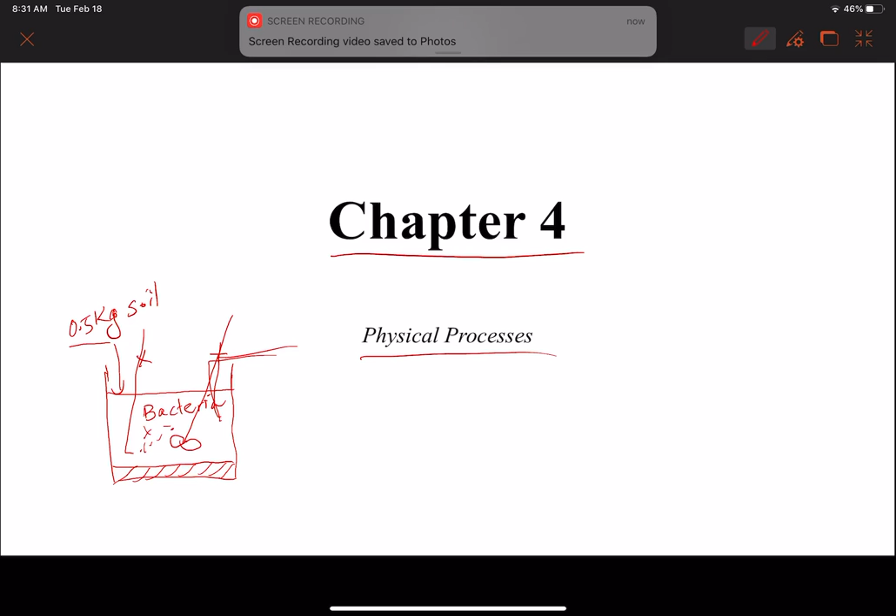About chapter number 4, physical processes.

In physical processes we have a small tank like this, and we use this tank to treat organics in water or organics in soil. There's the flow in, the charge in, concentration in, and at the end of treatment there is the charge out and concentration out. It's simply like a tank, and this tank is used to clean up soil or water with contamination.

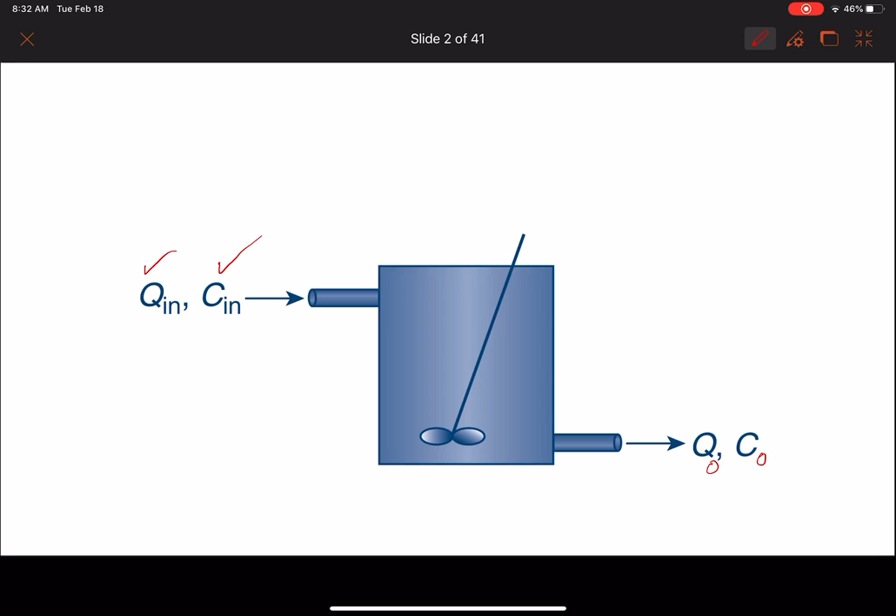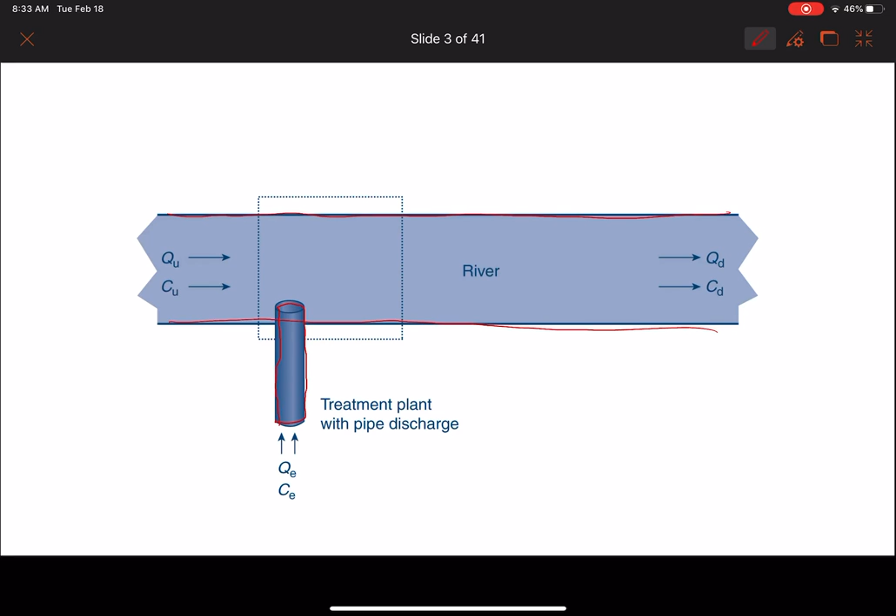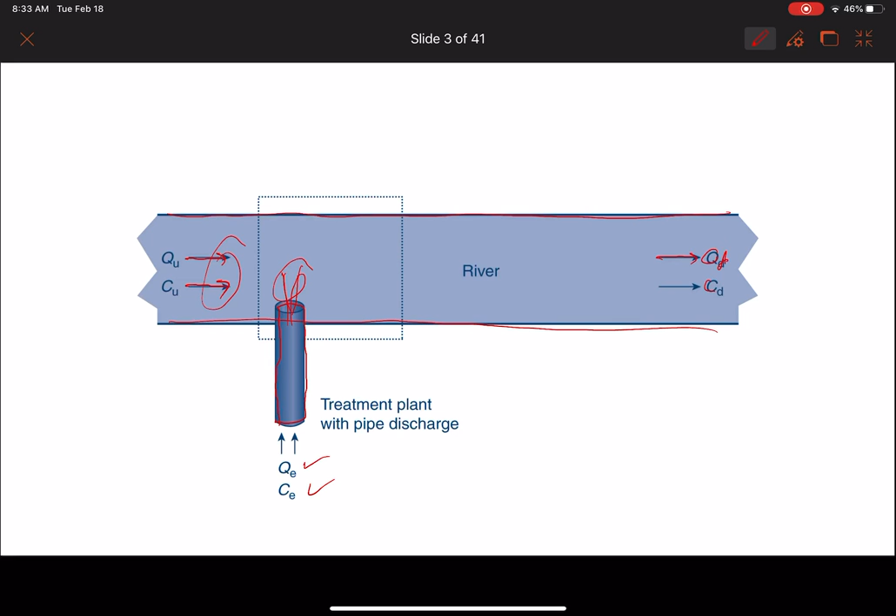Now we're going to use this process to model the physical process of environmental pollutants. You'll see it's either a tank or a river, with a pipeline coming from the Ministry of Public Work. This pipeline is emitting wastewater into a river flowing with discharge upstream and concentration upstream, plus the pollutant from the pipeline, which has its own discharge and concentration. This mixes to produce flow rate downstream and concentration downstream. This is an example of what we're going to see in this chapter.

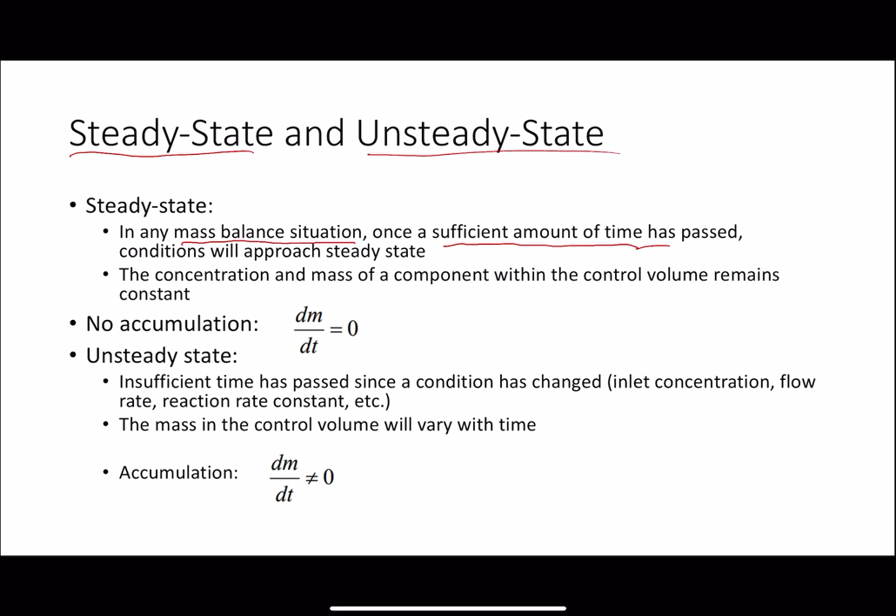Let's look at this. Once we are doing physical process, we should differentiate between steady state and unsteady state. What is steady state? In any mass balance situation, once sufficient time has passed, conditions will approach steady state. For example, if a physical process takes a long enough time to reach steady state, that means the change of mass with time is zero, because the concentration and mass of the component within the control volume remains constant.

Unsteady state is when there is no sufficient time that has passed since the conditions changed—we're talking about inlet concentration, flow rate, discharge, and reaction rate constant. So the change of mass in the control volume did not reach zero; it will be variable, not equal to zero, it will be different. This is called the accumulation.

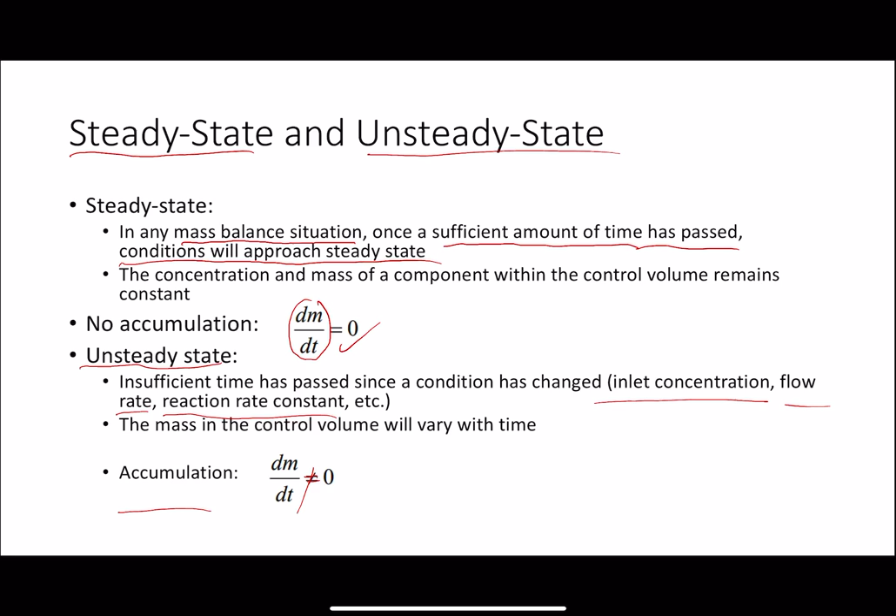For this chapter, there are a lot of models available in environmental engineering booklets, but in this one we'll be studying reactors, and we'll see what reactors are available for this class. These reactors are generally control volumes. Reactor models we'll talk about include the batch reactor, the continuously stirred tank reactor (CSTR), which is a continuous reactor—sometimes called CMFR, completely mixed flow reactor—and the third reactor is the plug flow reactor, which is also continuous.

This one is a batch reactor, which is not continuous. The only continuous ones are the CSTR or CMFR and the plug flow reactor. What is the meaning of a continuous reactor? If you have a tank, flow in continuously and flow out continuously—it does not stop. Same thing for the plug flow reactor: discharge in continuously and discharge out continuously.

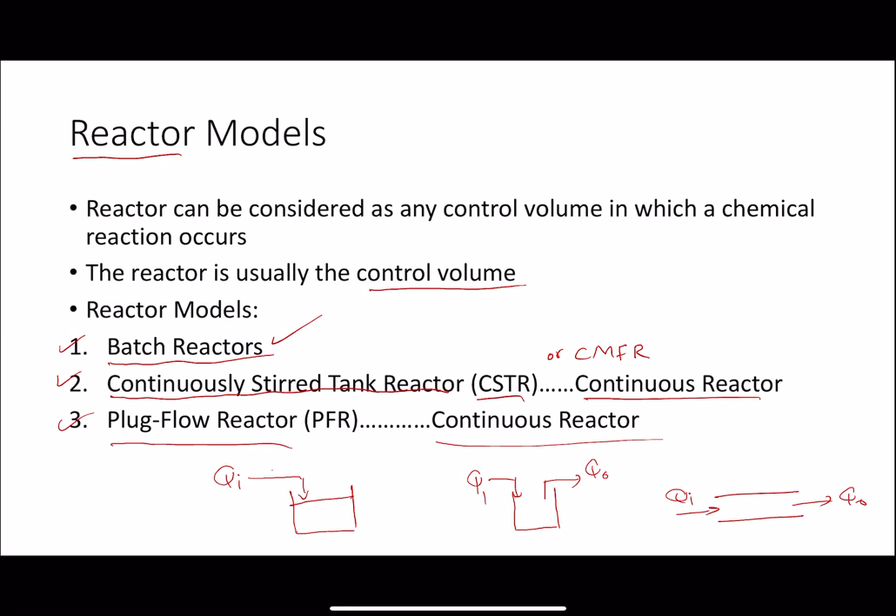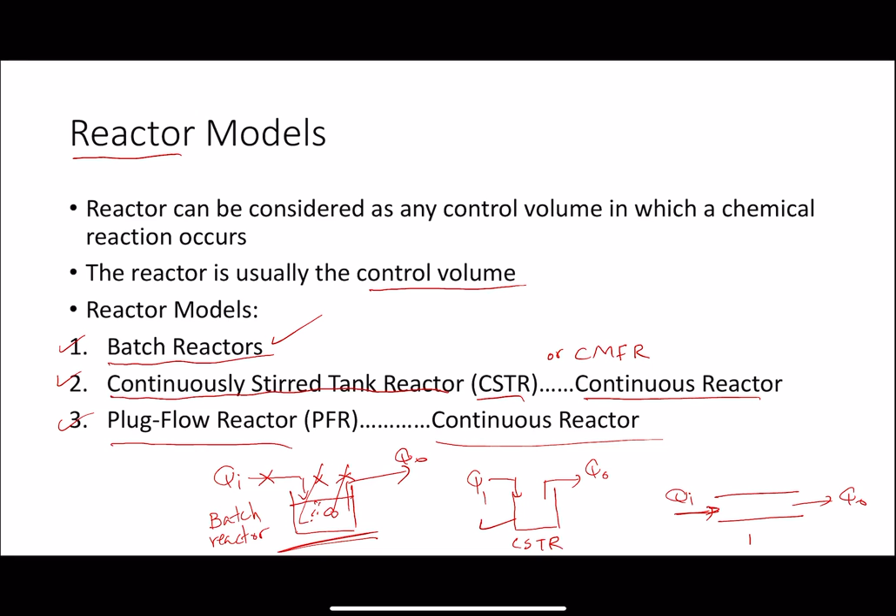But for the batch reactor, it's like a tank: discharge in until the tank is full, then they close the inlet pipe. They do mixing, add oxygen if needed. At the end of treatment, they stop mixing, stop aeration, and then take out the water, Q out. So it's not continuous—that's the batch reactor. Here, flow in and flow out happen continuously every second, and this is the CSTR or CMFR. And here, flow rate in and out is continuous—this is the plug flow reactor.

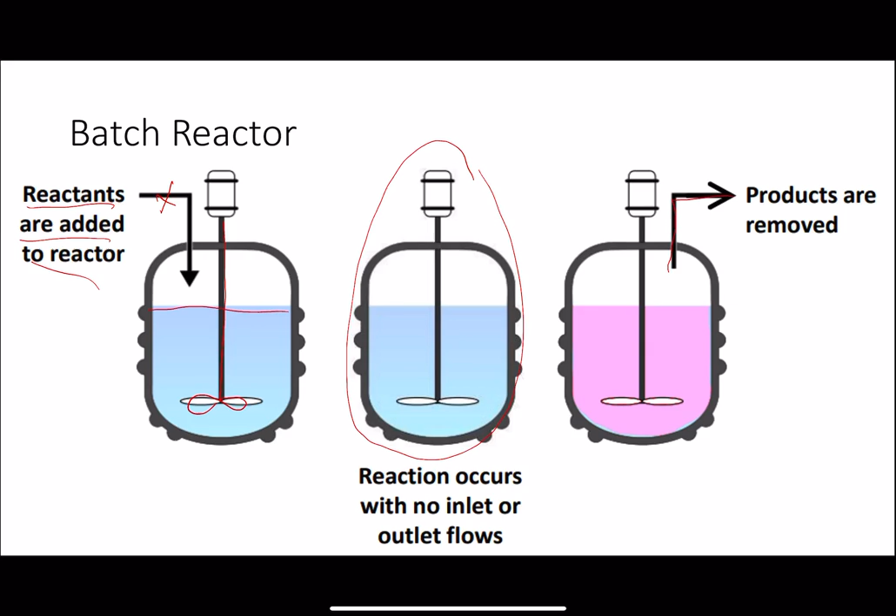So the batch reactor, as we just mentioned, has reactants added to the reactor, and then they do the mixing. At the end, when the tank is full, they stop this—you can see it here—and start the reaction, with no inlet and no outlet. At the end of the reaction, they take the water or products that are removed at the end of the experiment. So this is the batch reactor. Let's model the batch reactor first.

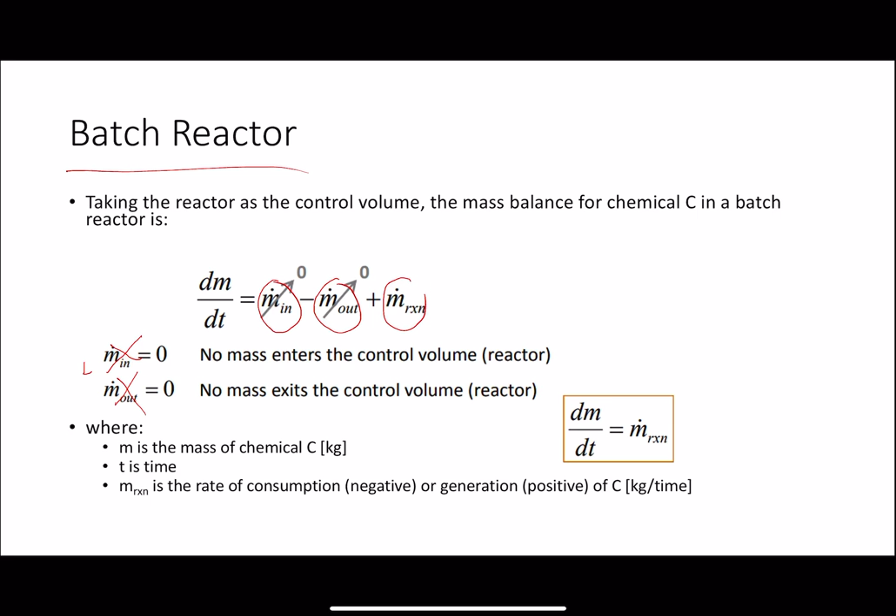The change of the mass over time is equal to the mass flow rate in, minus mass flow rate out, plus mass flow rate of the reaction. Now, there is no mass into the control volume during reaction, so this is going to be 0. There is no mass flow rate exiting during the reaction, so this is 0 too - only for a batch reactor. Only the mass during the reaction, the mass flow rate during the reaction, remains. So this is the equation for the batch reactor.

Now let's continue. We said mass, but remember we talked about it last lecture - mass is equal to C times volume. If C is in milligrams per liter, and volume is in liters, multiplying concentration times volume gives you mass. So whatever we did here, we'll put it back here: dm over dt is equal to m dot, the reaction rate.

The mass is CV, concentration times volume. So dCV over dt, and the mass during the reaction is the same thing, dCV over dt for reaction. Since volume does not change - the batch reactor has a certain volume, and we just fill it up to the volume we need - we take the volume out because it cannot be inside the d over dt, it doesn't change. So V dC over dt equals the same thing, V dC over dt for reaction.

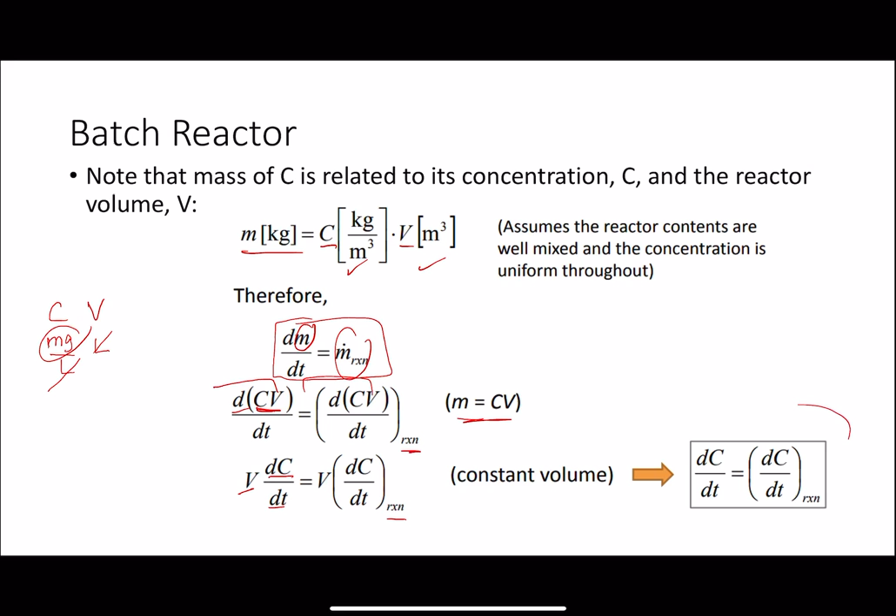Now we are close to this point. In the batch reactor, the change of concentration over time is from the chemical reaction, because there is some reaction inside the batch reactor. It's either a biological reaction, bacteria eating the chemical, or another chemical reacting with it to reduce it, or some type of activated carbon adsorbing the chemical in the water. So now we have to use the same equation here.

Now we want to find dC over dt for the reaction. For a zero order reaction, dC over dt is minus K - it's zero order because remember, it should be C to the power 0, and of course it's negative since the organic or chemical is being consumed or reduced. You integrate this and you get this equation. This equation is for zero order reaction for a batch reactor - you cannot apply this for a CSTR.

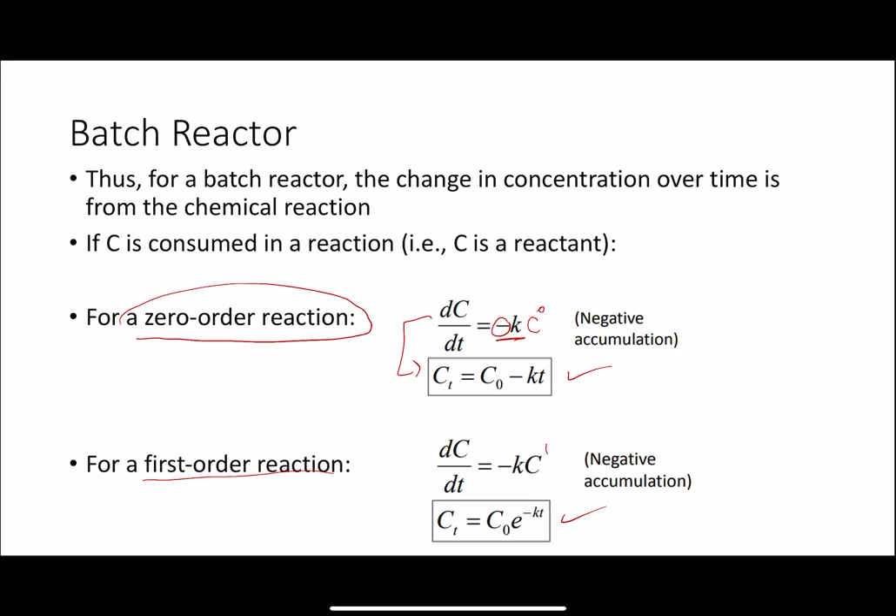For a first order reaction, dC over dt is minus K times C, and this is the equation, with a negative accumulation since it's being consumed. Now if you have a CSTR - in the book the abbreviation CMFR comes up, but mostly in literature and other papers it's CSTR - continuously stirred tank reactor or completely mixed flow reactor. They all mean the same thing.

So Q in, C in coming into the tank with the discharge flow and concentration. Let's say this concentration has to be high going into the CSTR. There is mixing, and if you are talking about bacteria, you have to have oxygen for the bacteria to breathe and biologically degrade the organic. At the end of the reaction, the discharge and concentration change, and then you could use the flow for some other usages.

Again, we apply it the same way: mass loading, Q in times C in, to find the mass loading. The same thing applies for mass loading out, so we can see how much mass has left the system.

We're going to assume this is completely mixed or well mixed. The concentration of a compound is the same everywhere except at the inlet. The concentration of the compound for the CSTR is the same, even here it's the same, except here it's not. Here it's high, and we expect this high concentration, once it comes into the CMFR, to be reduced to the minimum instantaneously, right away. So the concentration of the organic, the chemical, here and here is the same. Also the concentration in the reactor is the same as the outlet, and the outlet is the same as the end - but here it's not the same.

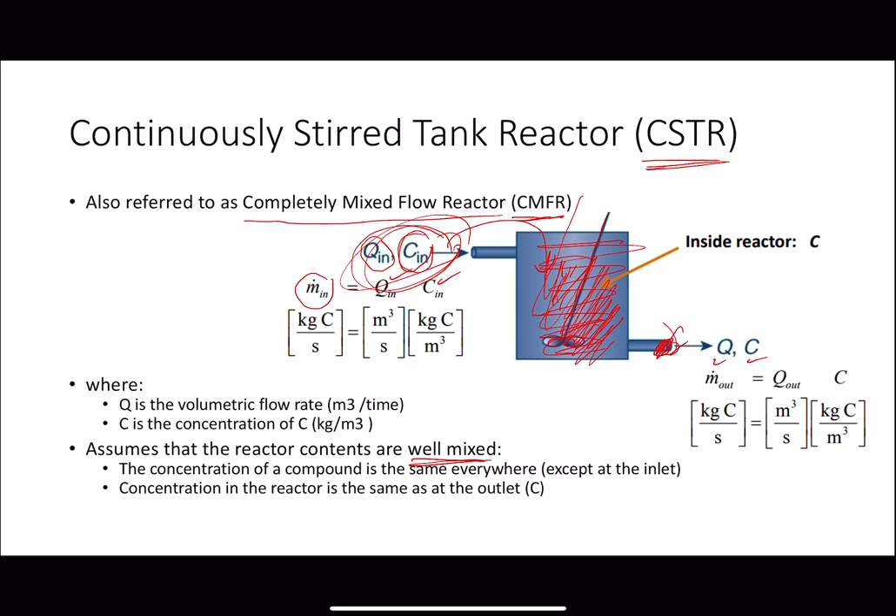Let's look at the CSTR modeling. We're going to apply the big equation: the change of mass rate equals mass rate in, minus mass rate out, plus mass rate of the reaction. So we follow the same equation: Q in C in, minus Q out - let's just put 'out' to make it different - minus Q out C out, plus any changes that happened during the reaction.

Okay, so now you should do it like this. Of course, this has to be C out. Volume we are assuming is constant. And C out, let's just take it as C, or you could make it C naught. It's up to you. So we have this equation. Now we're going to see zero order and first order.

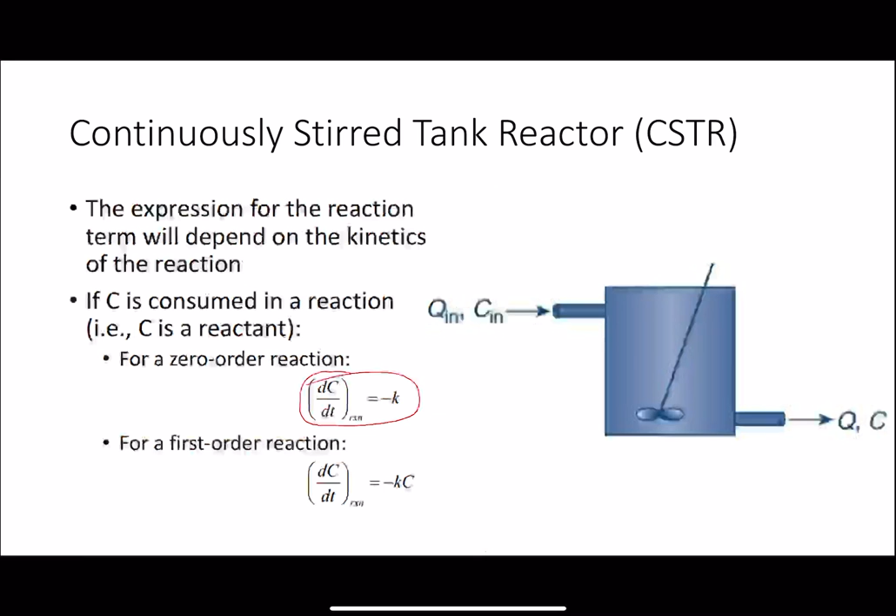Okay. For zero order, dC over dt for the reaction is minus K. So here we have to put minus K. What is it for a first order reaction? It's minus Kc. So this is minus Kc for first order reaction, and this is for zero order. So you choose which one you're going to use. If the chemical follows zero order, you should put minus K here. If it's first order, you should put minus Kc here. And this C is out. This is out, okay? Not in, out.

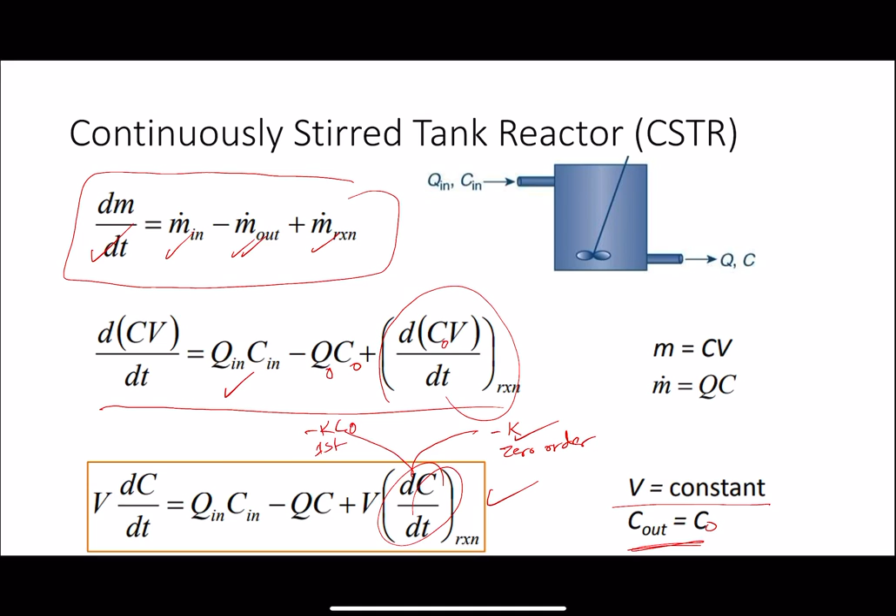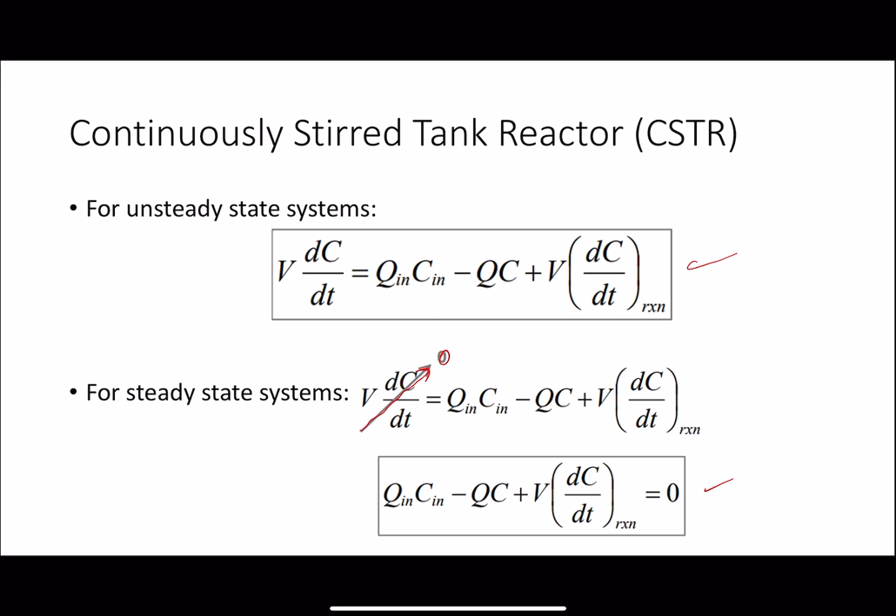So if it is unsteady, V dC over dt is equal to this. This is for unsteady state, and you have to do the equation as is. For steady state, we will know that there is no change of concentration with time. So this is zero. So for steady state, the equation would be equal to 0 because there's no change of concentration with time.

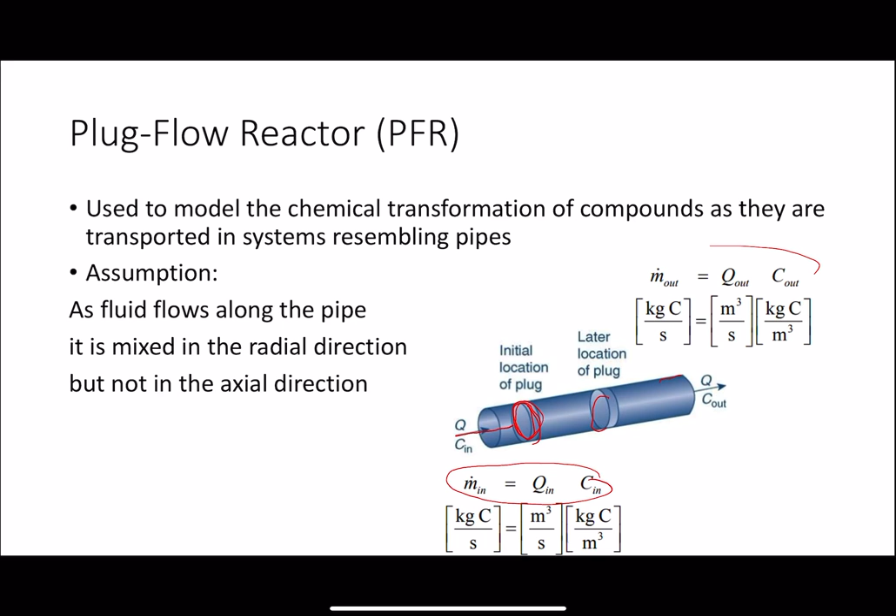Okay, so this is the initial, we call it a plug. This is the later location of the plug. The fluid is being mixed in the radial direction. Radial, see the radial? The radial direction, but not in the axial direction. So radial direction mixing and no axial direction, that is a plug flow reactor. Of course, we have to do a mass balance here, the mass flow rate in and mass flow rate out. Okay, so we'll do the same model and we'll do the control volume.

Here you can see that there is a single fluid plug as it moves along the length of the pipe. Look at this, a single plug, because the things change in the radial form. So there is no axial mixing. Sure, there is Q in and Q out continuously, but there's no axial mixing. So the axial mass flow rate in and out is 0, both. So the change of mass is equal to the mass flow rate of the reaction.

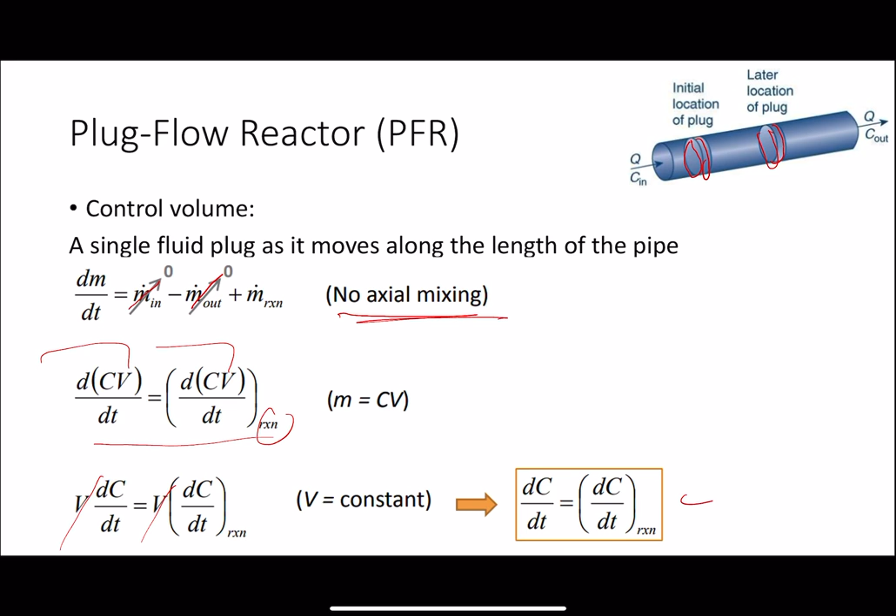So now we'll follow dCV over dt equals dCV over dt for the reaction, and then you take the volume out because the volume is constant, so you'll end up with an equation similar to the batch reactor. So for the plug flow reactor, for a first order reaction, it's dC over dt equals minus kc, and of course, if you want to do it for a zero order reactor, it's dC over dt equals minus k. You're going to follow the same equation for the zero order reaction. Okay, so you could call this C out, and this is C in, and this is the charge in, and this is the charge out, and you can see the charge in and out is the same.

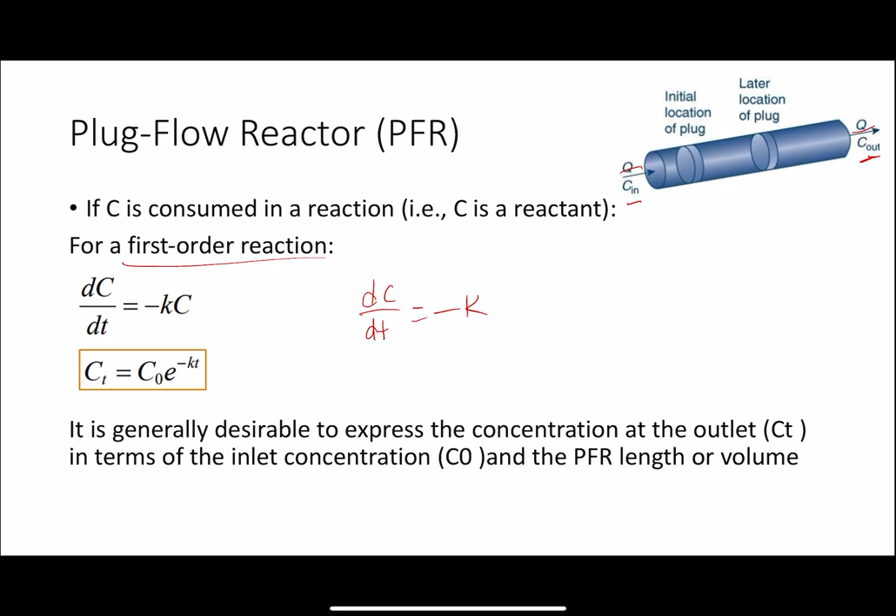Okay, for a plug flow reactor, there is an important parameter that we measure. It's the time spent in the plug flow reactor. How much time the water stayed inside the plug flow reactor? Of course, by the plug, because it's a plug moving from an initial location to a final location. The time spent is found by dividing volume over the charge. Remember, volume is meter cube. The charge, meter cube per day. Meter cube with meter cube, and you'll end up with day. So volume over Q is time.

And you could use it for the equation we just did before. The time here is volume over Q. And we call this time residence time.

So this could be like this: C out equals C in times E to the minus K volume over Q. Okay, and this is for first order.

And of course, this volume, you could see it is the area of this pipe times the length. The area of the pipe times the length, and that is the total volume we're going to be using here. The charge, of course, the charge in and out is the same.

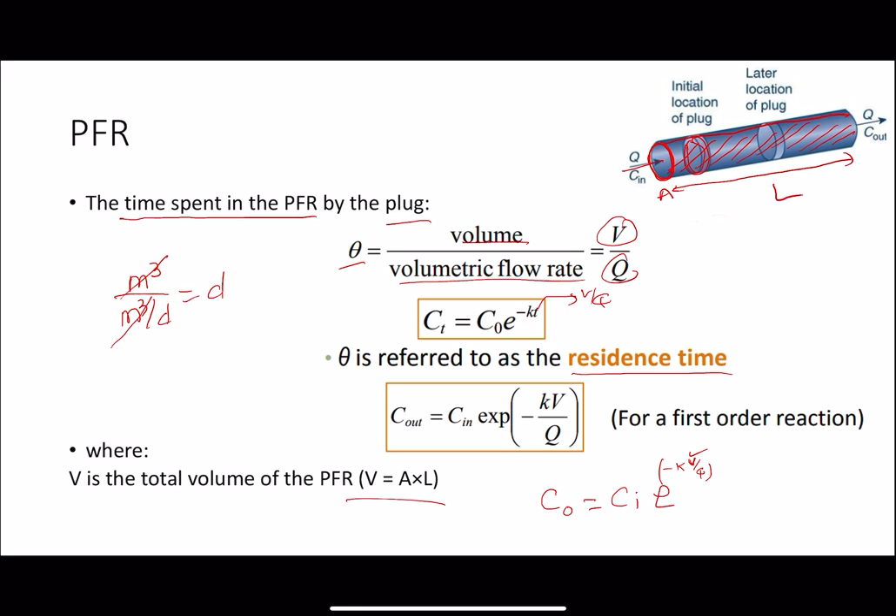Okay, before we end this video, let's look at this table 4.2, which is a comparison between CMFR and plug flow reactor performance. Which one is the best to treat water with pollutants? So, CMFR, which is the same as CSTR, and plug flow reactor, it's like a pipe.

Here you need to find out what is the concentration out. He gave you the volume, he gave you the flow rate, and he gave you K. Let's apply the equation for the CMFR. Well, of course, he did it right away.

Remember from the equation of the plug flow reactor, C out is equal to Cn times E to the minus K volume over Q. So you have Cn, you have K, you have volume, and you have Q. So let's find C out over Cn, it's 0.37. And now let's look for the CMFR.